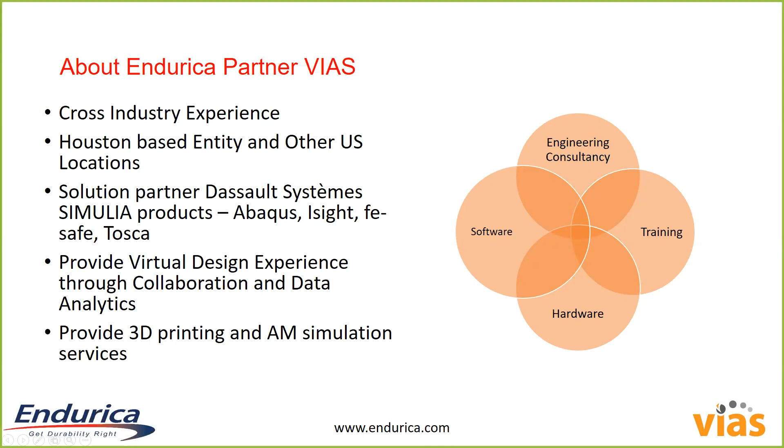Will, can you go to the next slide?

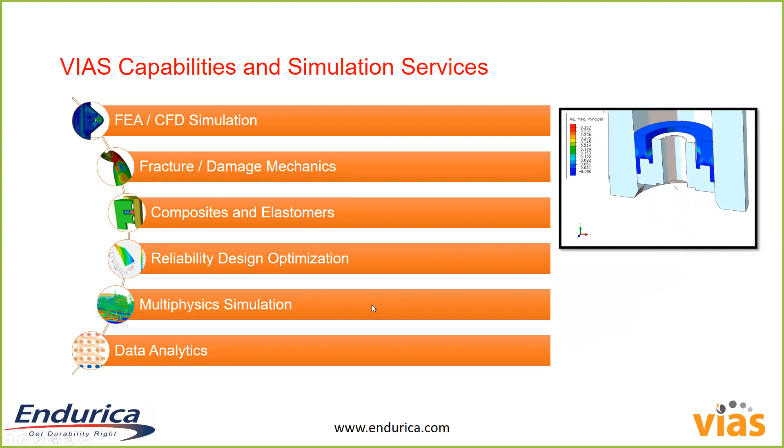Thank you. Our capabilities are mostly around simulation consulting services. We have strong expertise in FEA and CFD, fracture mechanics and damage, composites and elastomers, reliability-based design, and multi-physics simulation, whether fluid structure interaction, soil structure, or structural acoustic vibration. And as I mentioned, we also venture into data analytics applications for the engineering industry. So that's the overall introduction for Vias.

I'll let Will carry on from here with his Endurica solutions, and he will talk about the technology and theory behind Endurica. At the end we have an example problem taken from a real-life project; of course we cannot show the details, so we made up some of the geometries and applications, but it will show you the value of using the solution for fatigue durability of rubbers. Thank you, Will, if you can take it from here.

Thank you, Arundham. Really glad to be here. Will, you might have to unmute. Am I muted? Hold on. My microphone says that I am unmuted. Yeah, I can hear it. It was from my end. Thank you. Okay. Thank you for the introduction.

Glad to be here. I'm going to start off with a really high-level slide, just to talk about the kinds of solutions.

Of course, Endurica, we've been around since 2008. We are famous for and focused on durability of elastomers. That's all we do. Part of our solution, as Arundham mentioned, is software. We have software solutions that allow you to take your finite element model, model your part operating under whatever your duty cycle is, and then learn about the fatigue performance, go back into that analysis and diagnose where damage is coming from, the causes of damage. Very quickly learn how to get durability right. That's really what we're all about.

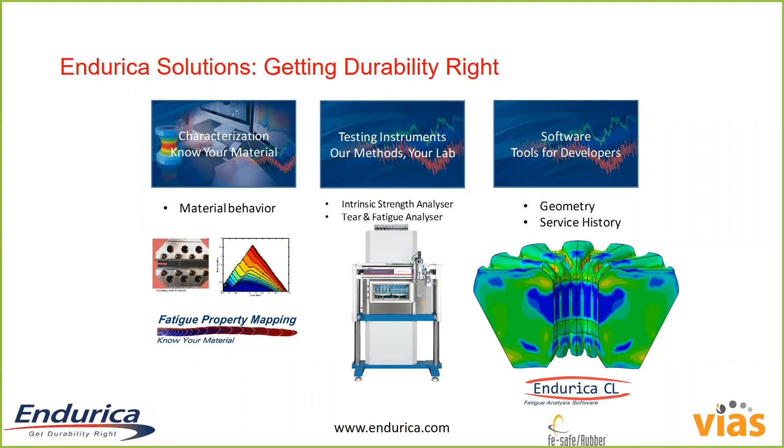All right. So in the next 40 minutes, I'm going to go pretty fast. The first chunk of material I'm going to present to you is really an update. I'm going to assume that you know a little bit about our solutions, and what I'm really going to talk about is what's new. We've continued to develop the technology, and in the last year there have been a number of really exciting developments in all of the solutions. So I'm going to do a quick scan through what those developments are and how they can benefit you. I'm also going to spend a few minutes talking about user validation experiences.

We've had a number of customers who've started to talk publicly in conferences about what they're doing with our software. Again, not time for much detail, but I do want to make mention and give you a reference you can follow up if you're interested. This is a solution that people are using to solve real tough durability problems. And then finally I'll talk about some future directions. After this set of slides, we'll talk about a specific example, a mud pump piston seal analysis that we've done.

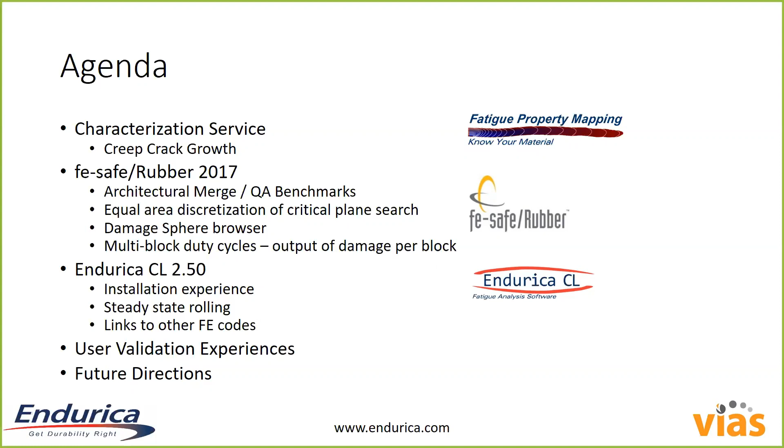All right. I mentioned that we have a fatigue property mapping service. This is how we measure the properties that go into the analysis, and that service has a number of different experimental modules. This is a list of all the modules. They cover the basic things like measuring stress strain curves, that's the hyperelastic module. Basic things like measuring a crack growth rate curve, your crack precursor size, that's our core fatigue module. The other modules are really what I call special effects. In rubber fatigue problems, depending on your application, whether it's high pressure, high temperature, or natural rubber that strain crystallizes, there are special effects, and to properly do a durability analysis you have to account for them. So this is our list of experiments that we can do.

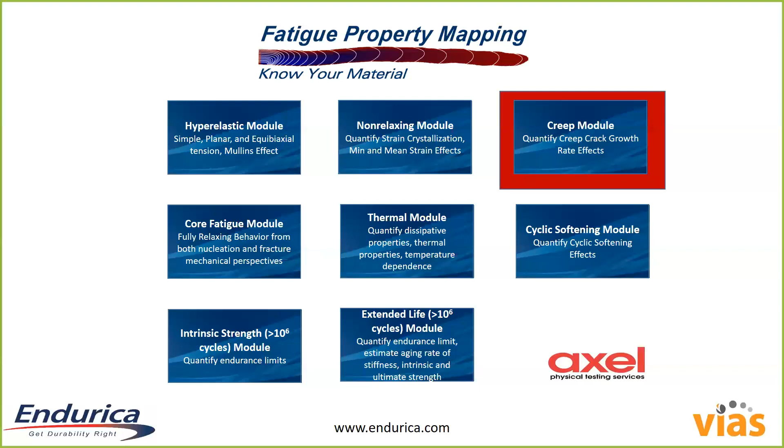If you go to our website, we give a lot more details on all of these. The one highlighted in red is a brand new experiment that we've developed in the past year called the creep module. This is a what's new talk, so I'm going to talk less about what's already there and more about what's new. This new creep crack growth module is an experiment that we developed in partnership with Schlumberger. This work is published in the ECCMR proceedings coming up in Munich, Germany.

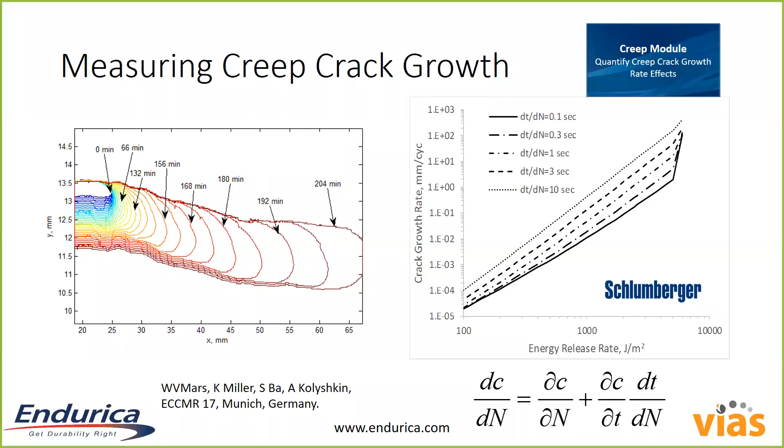And this phenomenon is important in problems where you have high loads present for long periods of time, as you might in downhole applications where you have very high pressures, high temperatures. You're leaving a seal in place for the life of the well. So anyhow, this is a new experiment we can measure, and then these parameters go right into the code. So that's what's new on the experimental side.

Now I'm going to switch gears and talk a little bit about some new things in our fatigue solvers. As you may know, we actually have two fatigue solvers. Both of them originated from our original code, Endurica 1.0. When we first developed FE-safe rubber, there was a branch internally to the code, and the codes took two development paths. FE-safe rubber is the solution that integrates with the Dassault FE-safe application. It's a plug-in to FE-safe. And Endurica CL is our standalone code that you can use on its own, and it's famous for, A, being standalone, and B, being code neutral. So it can talk to Abaqus, it can talk to ANSYS, and other finite element codes.

One thing that we've done in the last year is we've re-architected the internals of the code so that now when we build these solutions, they're built off of the same code base again. This is all internal, so people say, well, why do I care? But it's really been a major restructuring of the internals. It's cleaned up a lot of loose ends. And what it means for people using the solution is that in the future there's going to be faster migration of capabilities. A feature that shows up in one piece of code is much easier to transport across.

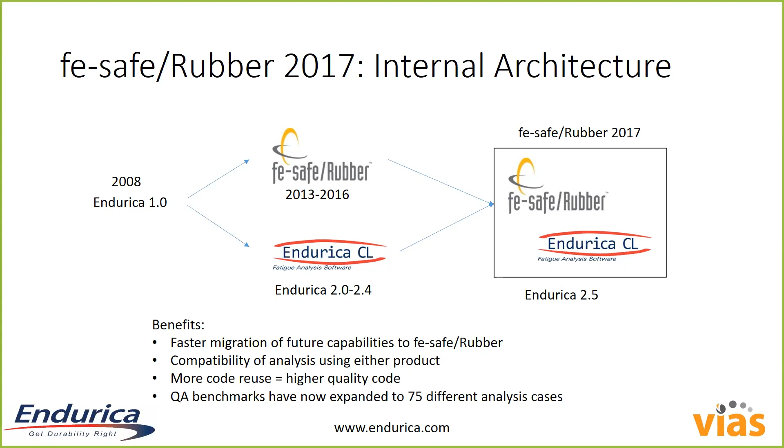All right, one of the features that was in earlier versions of Endurica, but that hadn't made it over to FE-safe Rubber yet, was what I call equal area discretization. Now, when Endurica does a fatigue calculation, we use a technology known as critical plane analysis.

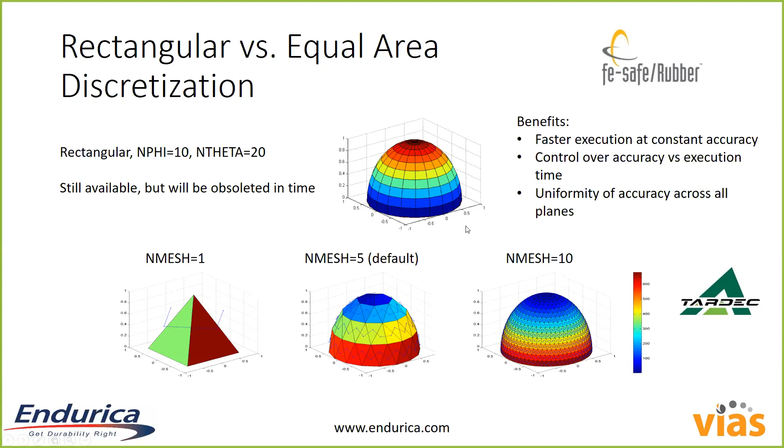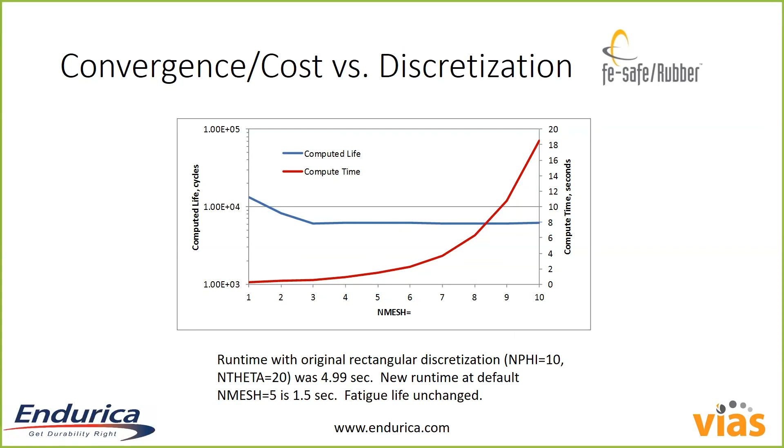But just to give you an idea of what this buys you, this is a plot of compute time and computed fatigue life for a benchmark case as a function of mesh density with the new case. And the bottom line is that if you ran this with the original discretization, the runtime was about 5 seconds. And with the new runtime at the default of nmesh equals 5, we had a runtime of about 1.5 seconds. So it's a speed up of nearly a factor of 3 for the same level of accuracy.

All right, another new feature with Endurica 2.5 and FE-safe Rubber 2017, and this is a feature that's available in both. There's a new tool for visualizing the results of the critical plane search. So at a point in your model, after we've analyzed all of the different possible planes on which a crack could initiate, we can plot the fatigue life as a function of crack orientation on the sphere, and we've now given you a tool to do that. This is a screenshot from that tool.

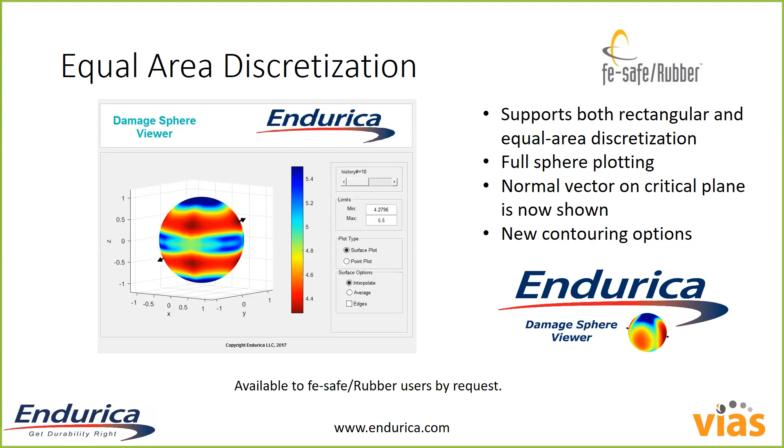So this sphere represents all of the possible crack orientations, and we've marked the most critical plane with this vector here. You see this black arrow that's marking the critical plane for this particular load case. This is a useful feature when you want to understand the relationship between the loads on your part, their directionality, and the damage that's accumulating. Right, so that's a new feature.

Probably the most important new feature in FE-safe Rubber 2017 is support for multi-block loading. Now they've had this for metals for a long time, but our plugin did not fully support this until recently. And what this feature allows you to do is to set up multiple load cases.

For example, this is an automotive CV joint cover boot, right? So there's a joint in here that flexes, and when you flex it, this boot bends, and then this thing rotates, and we want to protect that joint. And this is a very simple case where we just have two load cases.

In one case, the load case is a 5-degree, right? It's rotation with a 5-degree bend in the joint. In the other case, load case 2, it's a 30-degree. It's one rotation with a 30-degree bend in the joint.

And this new feature allows you to set up problems that have a form like, well, hey, I want to know how many repeats of the following schedule of loads the part can endure. So here I can specify I've got 1,000 repeats of load case 1. I've got 3 repeats of load case 2. How many times can I repeat that schedule before the part breaks? And here, to keep things simple, I've just put 2, but you can have as many as you like.

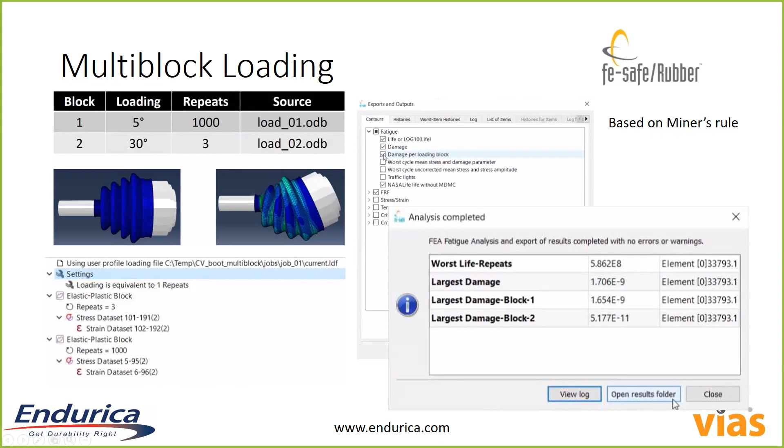All right, this is a feature that's aimed at people who are modeling tires, and this is a feature that, by the way, is currently only available in Endurica CL. But if you have a tire and you want to model rolling of the tire, you don't necessarily have to model actual physical, Lagrangian rolling of the tire. You can simply use a modeling procedure called steady state rolling, and Endurica knows how to recognize the results from a steady state rolling analysis.

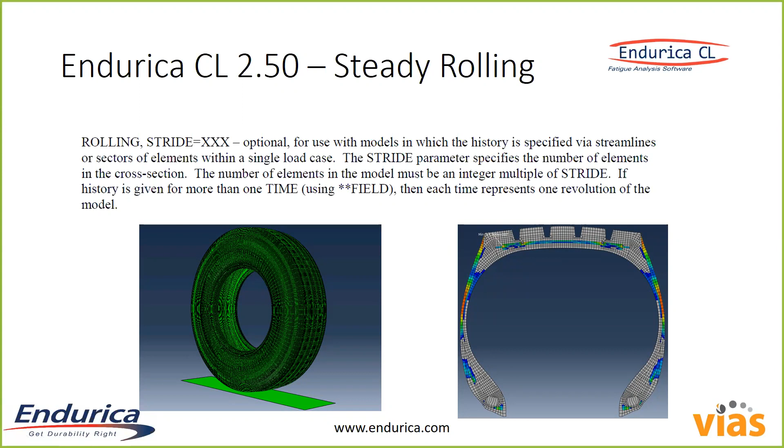And so what it will do is if you say this is a rolling model, Endurica will recognize that your goal is to compute a fatigue life for each element on a tire cross section, right? So even though this is a 3D model, it reports the results on a 2D cross section, and the time histories for each element are derived by following the strain history as an element travels around the tire. So again, this is for rolling structures. If you're doing tires, if you're doing a roller, then this would be a feature that would be interesting for you.

Another feature that's new with Endurica CL is we have outputs that allow you to ask for cavitation, wrinkling, and crack open close state information. Sometimes in rubber, depending on your loads, you can actually have failures that are not necessarily due to fatigue. For example, if you put a high hydrostatic tension on the rubber, where the hydrostatic pressure gets bigger than 5/6 of the Young's modulus, voids will spontaneously open up in the rubber, and that can be a failure mode. Endurica knows how to check for this, and if you ask for it, it'll give you a time history of where and when cavitation might be happening.

Similarly with wrinkling, this happens on free surfaces where you have compression. We're using the criterion that was published by Gent and Cho back in the late 90s to check for surface wrinkling and give you kind of flags when that might be happening.

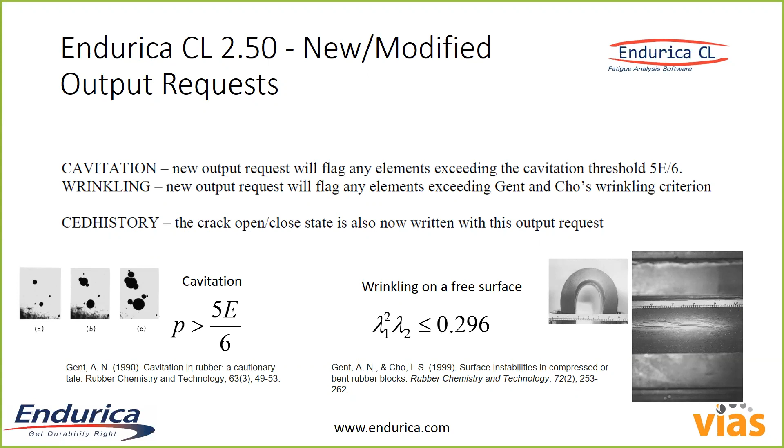Finally, there's an output request that can tell you the open close state on a crack, right? As we're doing a critical plane search, Endurica knows the time history of basically every crack and every orientation. And if you want to know when the crack is open or closed, you can say, hey, tell me that. And it'll give you a time history of what the crack state is. Here's an example of that for a tire model.

So here's a tire model. This is a straight ahead rolling under a load, and the blue line represents, think of this as the energy release rate on the crack as it goes through one revolution of the tire. The center of the footprint of the tire is 0 degrees. You can see when we're at the top of the tire, far away from the footprint, there's a small amount of load. That's probably due to the inflation pressure of the tire.

As we approach the footprint of the tire, there's some bending, right? You're taking a round structure and you're applying some bending to flatten the structure out through the footprint. That causes the loads at the belt ending to experience a spike as it enters the footprint, goes through the footprint. On the other side of the footprint, as that bending is reversed, that crack that opens on one side of the footprint actually becomes completely closed.

And you can see that by looking at, I've taken the crack state output from Endurica and I've plotted that as this gray bar. So you can see most of the time this crack is open, but there's an instant on the exit of the footprint where that crack closes. And of course, a closed crack doesn't grow unless you're shearing it, and so we account for that crack closure effect.

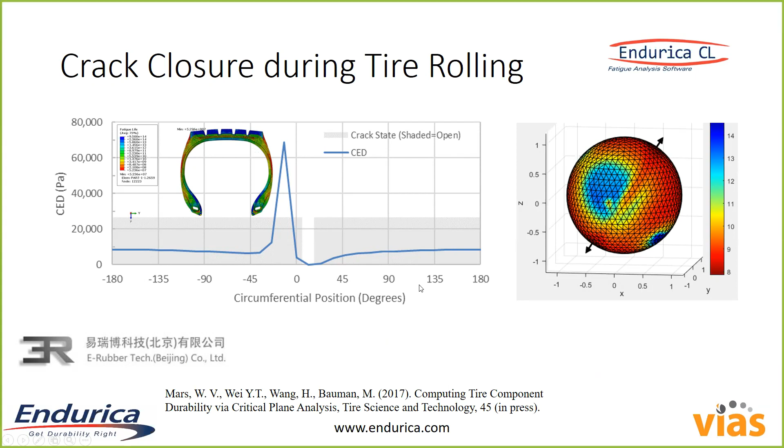So that's a little bit about updates to software things. I'm going to switch topics now and review some things that customers have been doing with our solutions.

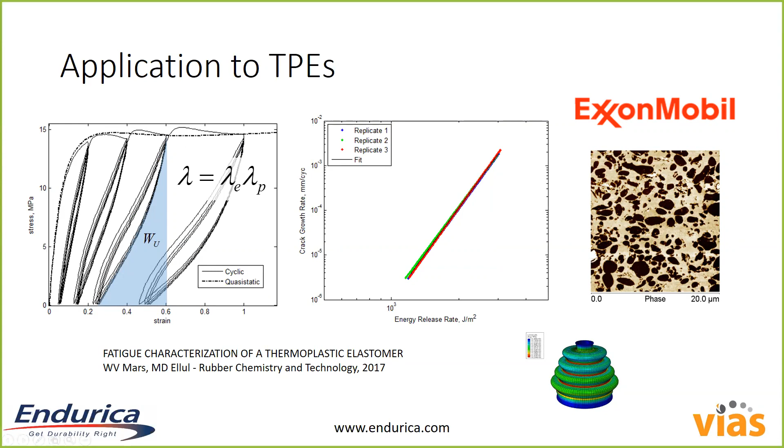This is a characterization that we published with ExxonMobil, looking at applying our solutions to TPEs, right? The defining feature of TPEs is they show a lot of plasticity. And if you go back and read this paper, you can kind of see how we've handled the plasticity. So a lot of times people ask us, can you use your methods with TPE materials? And the answer is yes, but you do have to account for the inelasticity, and our solutions allow you to do that. So you can, like I say, read more. This has just come out in the next issue of Rubber Chem and Tech.

Another interesting example is looking at very complex load histories. Right, in the automotive sector, it's pretty common to have road loads. This is 3 channels going into a bushing in this case, and so this is a work that we did with GM, where we did fatigue analysis, and we were able to predict the failure modes and life based on very long, complicated load histories.

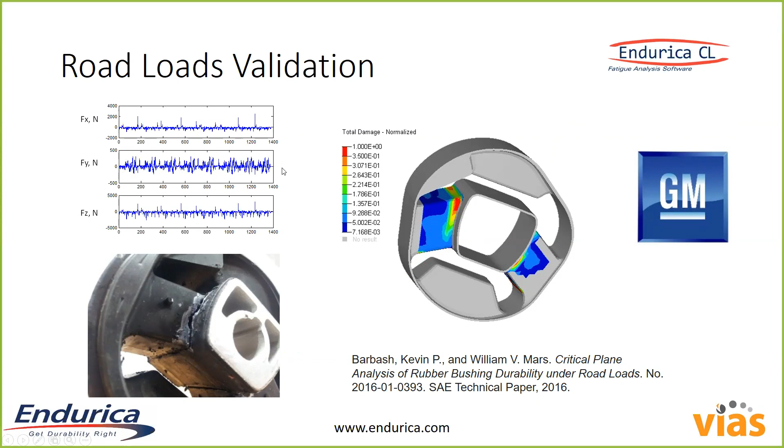Another example. This was a really nice example that Tenneco did using our software, and they actually went back and did probably the most careful validation study I've seen. I hate to think how much they spent on the experiment. Just the experimental work alone to do this validation was really impressive. But you can see here. So this was a bushing under 4 channels of load, right? Radial, axial, conical, and torsional. And in this case, here's 4 different load cases that they've looked at.

So this is the experimental fatigue life. This is the predicted fatigue life with our software. You can see that in every case, we were within a factor of 1.4 on fatigue life. In metal fatigue, they say if you can get better than a factor of 2, you're doing really good. We were able to get within a factor of 1.4 on life every time. And if you look at the animations of these, which I don't have here, they're very complex loading states, so it's just again examples of things that people are doing with our software.

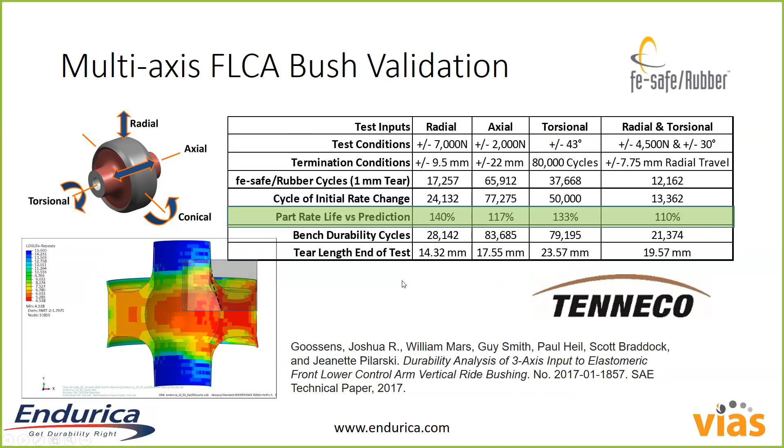Okay, so future directions. So some things to look for in the next year with our software. We're developing what I call a restart capability. Right now when you run our software, what it tells you is how many repeats does it take to fail your part. In the future, you're going to have the ability to say, well, run this load case for 10,000 cycles, and then do a new thing. Right, it's really kind of an expansion of the multi-block feature that I've already showed you. We're going to be expanding that, and it'll be useful for doing things like residual life calculations.

We're working on a stiffness loss capability where you would be able to model the progression of stiffness as a function of cycles in your part. We are looking at heat aging effects in elastomers, and finally load mapping and interpolation features. So these are all kind of future directions that you can expect to see in the next year or two coming out in the code.

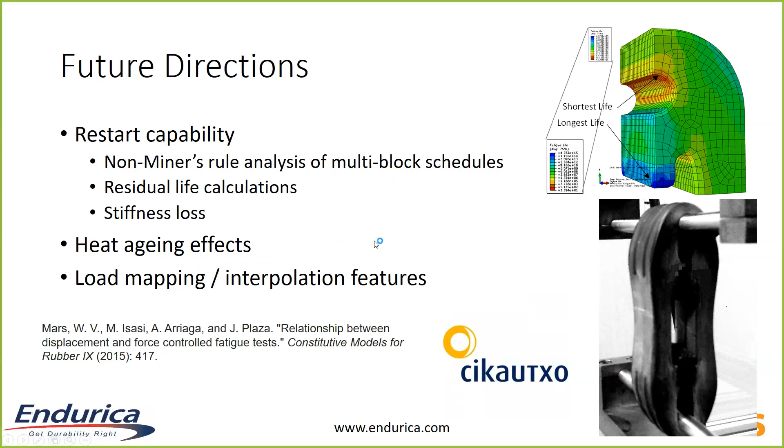Okay, so I know that was quick, and we're up to 11:40. So I'm going to switch over now to a particular example of our analysis. And this is a polyurethane mud pump piston seal. This is a project that we did with our partners at Vias, and I actually didn't do the modeling on this. Our analyst Mark Bauman and the Vias guys collaborated to pull this together. But just for the sake of continuity, I'm gonna talk about it.

So here's a picture of the piston seal. Right, this is a component of a pump that is used to keep drilling fluids under high pressure. And I'll show you an animation of this later, so I won't say too much more than that. But here you go. So here's kind of how the piston works. Right, it's inserted into this bore, and then the fluid is kind of pressurized cyclically.

And let's see here. So there's an installation on the left-hand side. That's the animation that shows the installation. On the right-hand side, this is an animation that shows the operation. I'll run those through again. So here's the installation, right? So you can see that there's a kind of an interference fit between the piston and the outside wall, and then that happens once, and then the actual fatigue duty cycle is this pressurization, right? That's going on, and you can see the seal kind of reacting to that pressurization. And ideally in the field, we would like to see 1,000 hours of life.

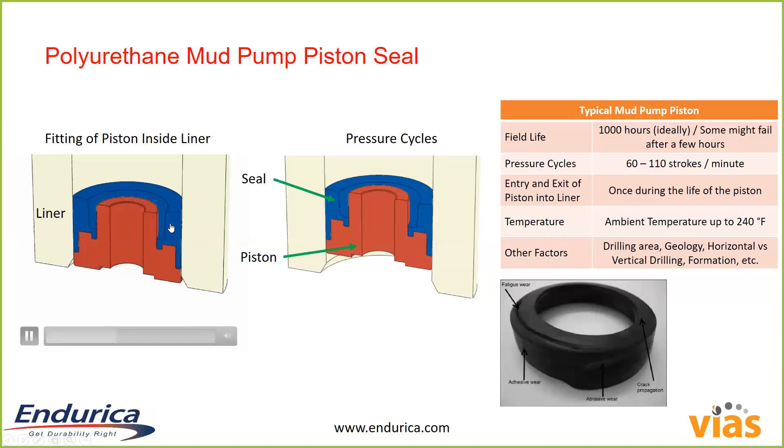The basis for our analysis is the assumption that whenever you have rubber, if you get out a microscope, it is filled with microstructure, right? There are crack precursors already in that. Now, granted, they may be very small. Typically, they would range anywhere from maybe 2 microns up to 100 microns. But failure analysis is all about figuring out where and when do those small crack precursors grow up to a size where they become a problem.

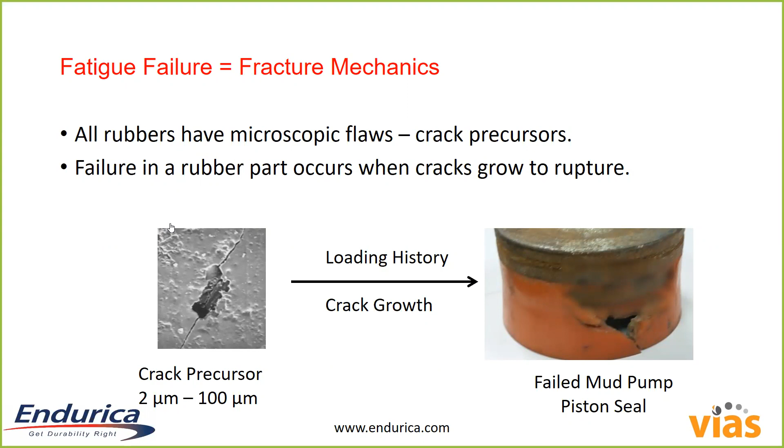And so in our analysis, we've used these material properties. So there's a liner and the piston itself that are metallic things. Those are linear elastic. The seal is, of course, the interesting part. We've used an Ogden strain energy potential here, and we've plotted out the stress strain curves here. The data points are shown. We actually had, for this problem, limited experimental data, but we've done our best to fit a

hyperelastic law. The blue curve shows the simple tension response of the material law. For those who are familiar with using a hyperelastic law, it is typical to do experiments in planar tension and biaxial tension. So the green and the red curves are the planar and the biaxial stress strain curves that are predicted from our model. Here we haven't measured those, but we would certainly normally recommend measuring all 3 stress strain curves with our hyperelastic module.

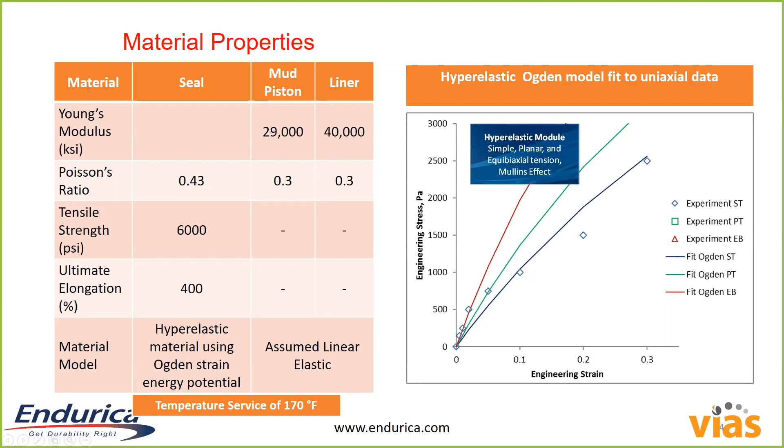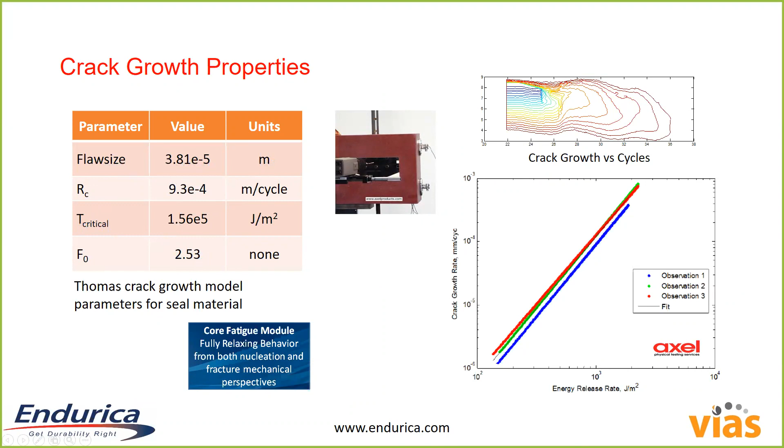And this is a list of the properties. So we have a determination experimentally of this crack precursor, or the flaw size. In this case, it's 3.8 times 10 to the minus 5 meters, which is like 38 microns, which is pretty typical. Strength of the material TC, the power law slope F naught 2.5. This is, I believe, a polyurethane that we're looking at.

This is a slide that summarizes the boundary conditions on the model. So first of all, step 1 is fit the piston inside the liner. The operating pressure is 5,000 psi, and the question is how many cycles of that 5,000 psi does it take to start cracking, and where is it going to start? How many repeats of the 5,000 psi load is it going to take at 170 F?

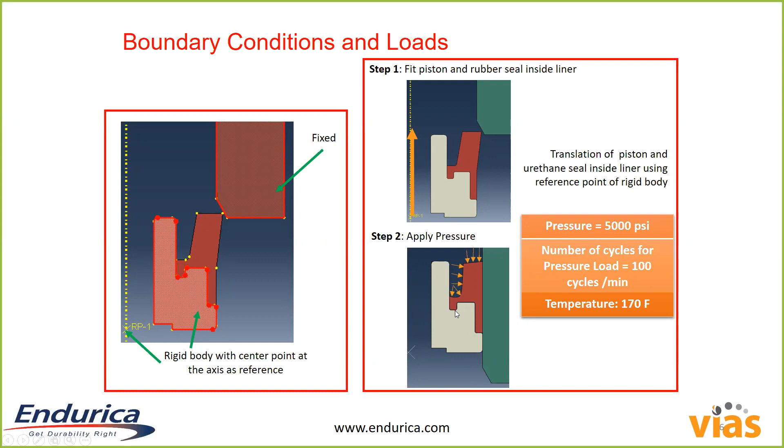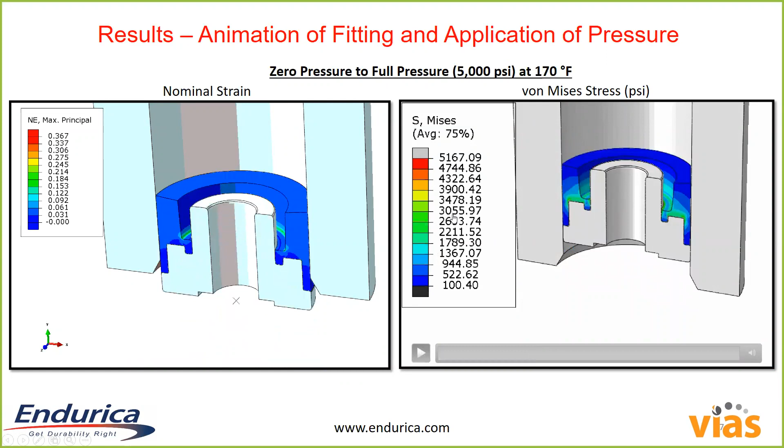And again, just these animations. Now these animations are showing the strains and the stresses that are developing on the part. So you can see where you have corners in the model you're getting strain concentrations. So that's the insertion step. Here's the view with just von Mises stress plotted. Of course, we're not so much interested in stress. I mean, stresses and strain are interesting, but what we want at the end of the day is what's the impact on life. And so by taking these material properties and using these stress strain results with our analysis, we can find the fatigue life.

I mentioned before we're using critical plane analysis, where for every point in the finite element model, we're going to do a search over every possible plane on which a crack might start. We're going to resolve the stresses to that specific plane. We're going to do a rainflow count on whatever history occurs on that plane, and then we're going to integrate our crack growth rate law using that information, and we'll just repeat that for every possible plane.

And once we're done, we can see that, obviously, the fatigue life depends on the orientation of the crack, and there will always be a particular orientation that results in the fastest rate of crack growth and the shortest fatigue life, and that's what we predict as the orientation of the crack that nucleates. That's what we predict as the fatigue life for that element of the model.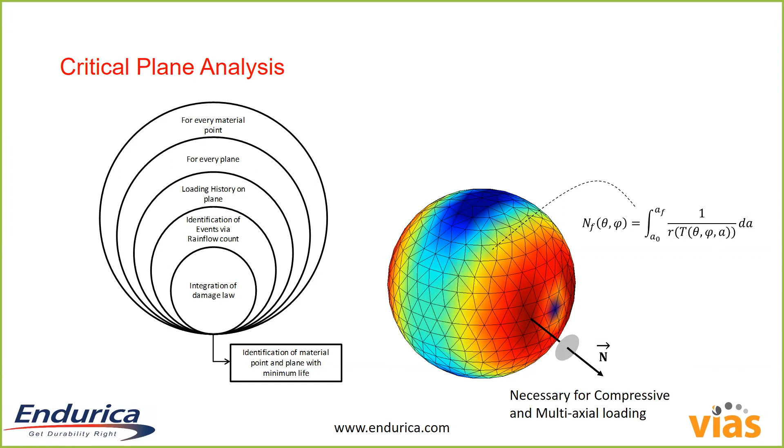So this is just a picture of the workflow, right? We're going to take the strain history. We're going to do our critical plane search, right? Here's my crack, and I'm just scanning it through all of the possible orientations. For each orientation, I'm going to pull out a load history for that particular orientation. I'm going to do the rainflow counting.

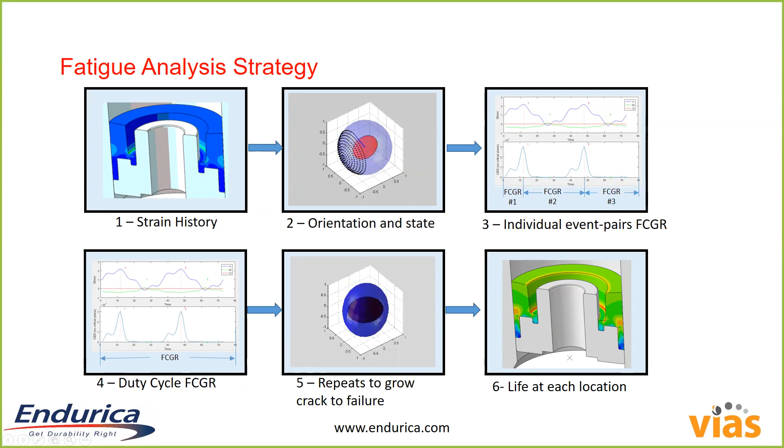Let's go ahead and get this to play. For each plane, we play the load history into the crack, and the crack grows. And then, like I said, we repeat this process for every element, and then we plot fatigue life on the part. And so this is the final result.

You can see we're predicting the shortest life is basically at this sort of intermediate place on the seal. Here you can see the crack after it's initiated and torn through the seal, and you can see that, yeah, we got the location right.

And what's more interesting is you can actually do design optimization. So you can imagine that the shape of the insert here has an effect on the stresses and strains that are experienced, and you can ask the question, well, what shape should that be to get as much life as we can? In this case, we predicted a life of about 450 hours, and this was an initial model.

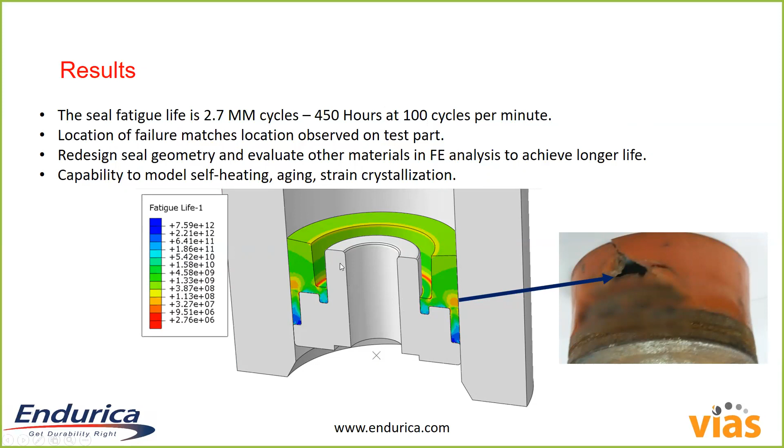And then with the project, I believe it was a factor of 5 increase of fatigue life. I can't show the final model because that was a proprietary output from a project, but we were able to obtain a very substantial fatigue life improvement by doing a small number of iterations through the fatigue analysis.

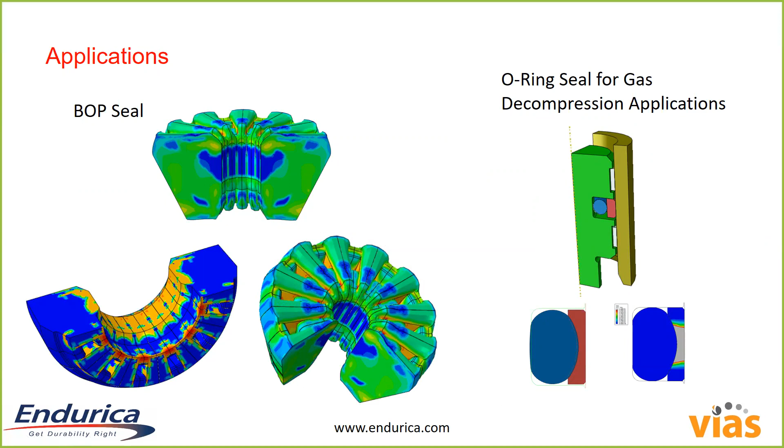So that's just one example. We've also done analyses on blowout preventer seals. We've done O-rings. The workflow is very simple to use and powerful as well. There's a very large palette of different effects that you can include depending on your application.